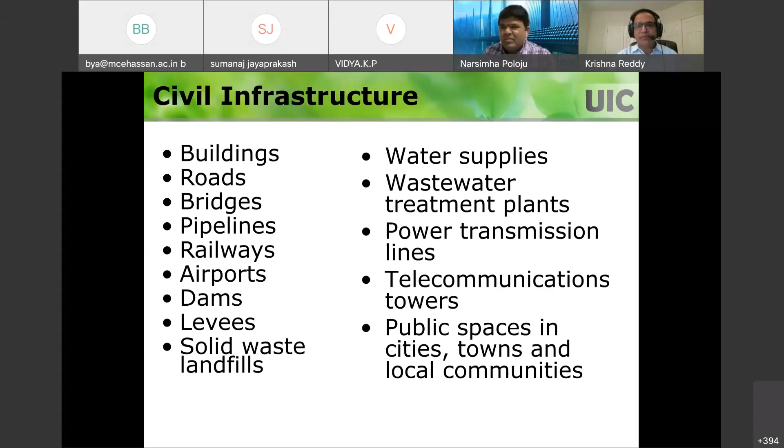With respect to buildings, when you talk about civil infrastructure, a lot of times buildings come into picture. But civil infrastructure is more than buildings—roads, bridges, pipelines, railways, airports, dams, levees, and landfills. Not only that, we have to deal with water supplies, wastewater, power transmission lines, telecommunication towers. So the role of civil engineers is very essential for sustainable development.

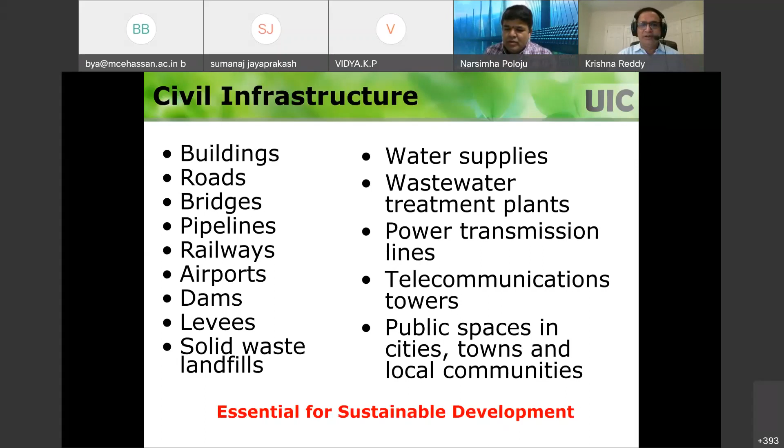So our role is not just building the buildings, but we have to build all these kinds of infrastructure. So that's what we need to keep in mind.

Also, all the infrastructure that was built in the US did not consider sustainability or environmental aspects. As you see from here, a lot of development that happened in the US came at the cost of a lot of ecological damage.

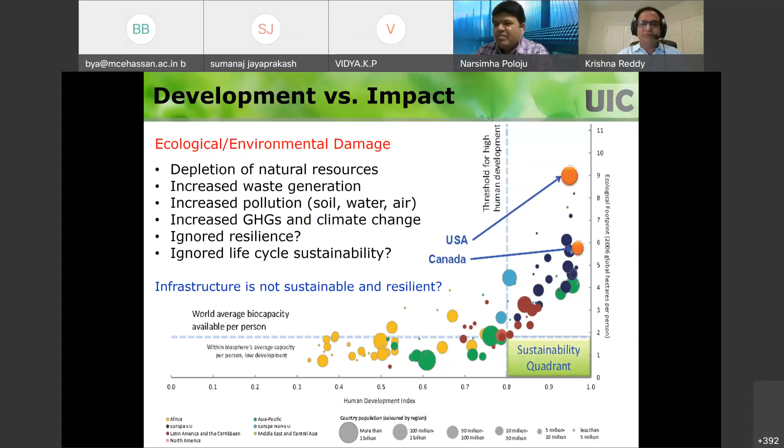As I mentioned, we didn't consider ecological and environmental damage when these were being built a long time ago. We didn't consider energy efficiency, depletion of natural resources, increased waste generation, increased pollution, and we didn't consider greenhouse gases and climate change at that time. We didn't consider resiliency. We didn't consider life cycle sustainability. So there are a lot of things that are now considered important that were not considered at that time. So therefore, the infrastructure is not sustainable and resilient.

So going into the future, we should be looking at infrastructure development in a different way. So the problem with current civil engineering practice is that we follow codes and regulatory requirements and we design for technical safety. That's what we teach in our universities for students.

And then when it comes to the real projects, we look at the design that is easy to construct, that costs less, and that takes less time for construction. So there's nothing wrong with these things. We have to be doing these things.

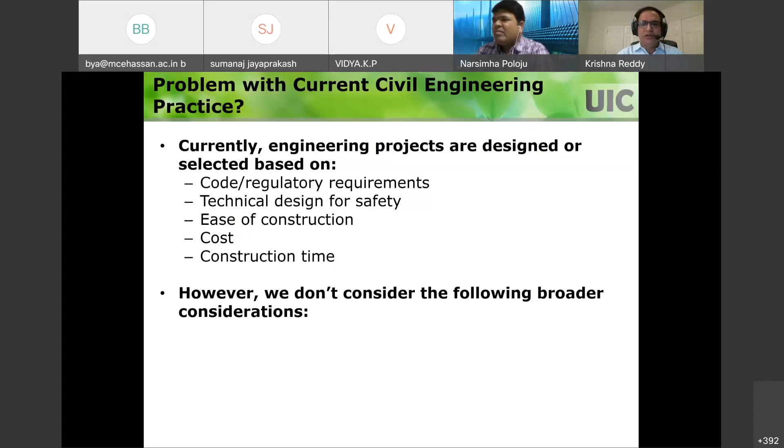But going into the future, we should be considering sustainability, life cycle thinking, resiliency. If you consider these things, we may be coming out with innovative solutions that are effective and economical and environmentally safe, and also contribute towards sustainable development.

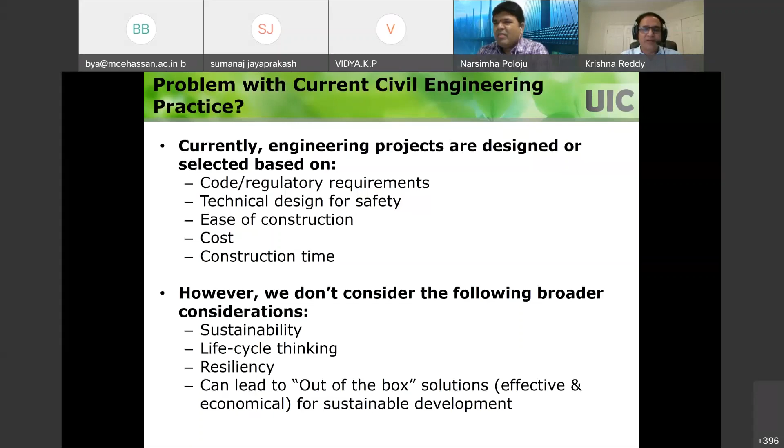So this is where our civil engineers need to be educated and do things in a way that is sustainable and resilient. So a lot of people know about sustainability.

And this definition, this functional definition, can be applied at different scales. It could be small scale or large scale. So that's what we're going to use in my framework.

So when you talk about sustainability, the scale of sustainability projects can vary quite a bit. Global scale, as we speak, COP26 is going on in the UK, and all the countries are thinking about how to cut down greenhouse gases. So that's a global effort. And every country has their own plan, national scale plan, and even India has its renewable energy plan. Regional scale, you could have a state level or city level, or business or institution scale. You could have sustainability assessments within the university or within the company that you're dealing with.

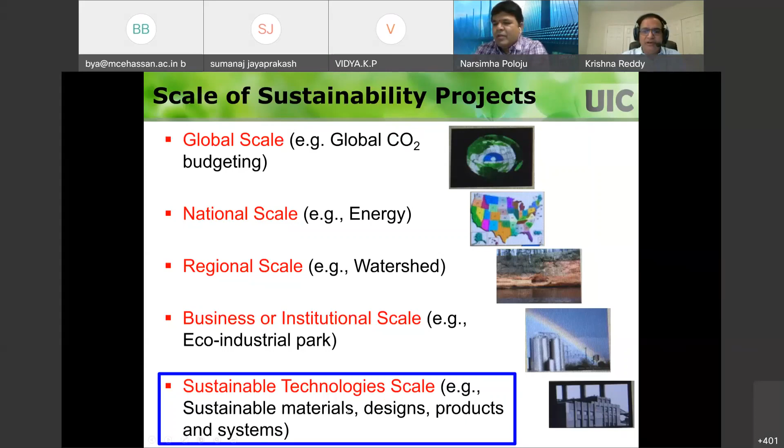But you could also have a sustainable technology scale. And as engineers, in day-to-day activities, we should be able to contribute at this scale, if not at all the scales. So ideally, you want to contribute at every scale. But however, on a day-to-day basis, you should be able to contribute at the sustainable technology scale.

Now the question is, okay, I want to do things based on sustainability and resiliency. So what should I do? How do I go about incorporating sustainability in my work? So this is where you need to look at, okay, I designed something, and how can I say it's sustainable? So we need to have a quantitative framework to assess the sustainability.

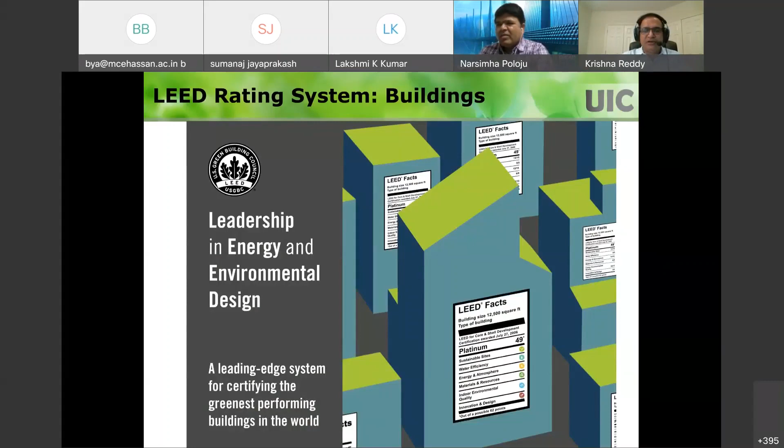Many in civil engineering and architecture know about the LEED rating system. This is for buildings - you get a rating of platinum, gold, or silver based on what environmental features are incorporated in the building. This is one of the systems used to design green buildings, which mainly consider only environmental aspects.

There's another framework called Envision. Since we have LEED for buildings, we didn't have anything like that for assessing other types of infrastructure. So the Institute for Sustainable Infrastructure, in association with ASCE, came up with this Envision rating tool. It's similar to LEED - it has 5 categories with different credits, you score each one, and based on the score you get different awards, just like LEED. There are 64 sustainability and resiliency indicators that you go through to give the rating based on your project features.

LEED is applicable for buildings, and if you want to apply Envision, it has to be a really large project - these are for the overall project. But as an engineer, we may not be looking at the entire project, and may not even be going for LEED or Envision rating. On a day-to-day basis, I want to do my work and incorporate sustainability. So that's what I call project components.

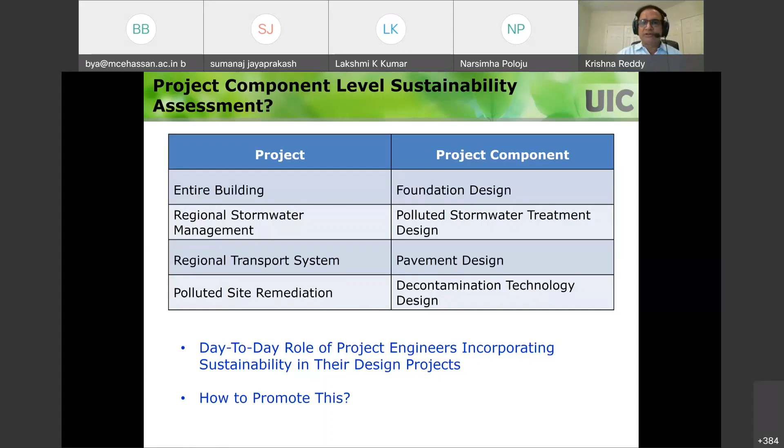What I'm trying to say is LEED and Envision are applicable at a high level, project level, a larger scale. But at the project component level, what can we do? These are the projects engineers deal with on a day-to-day basis, and how can we ask them to incorporate sustainability in their design? How do we promote this? These are the things I've been focusing on recently - how do we consider sustainability at the project component level?

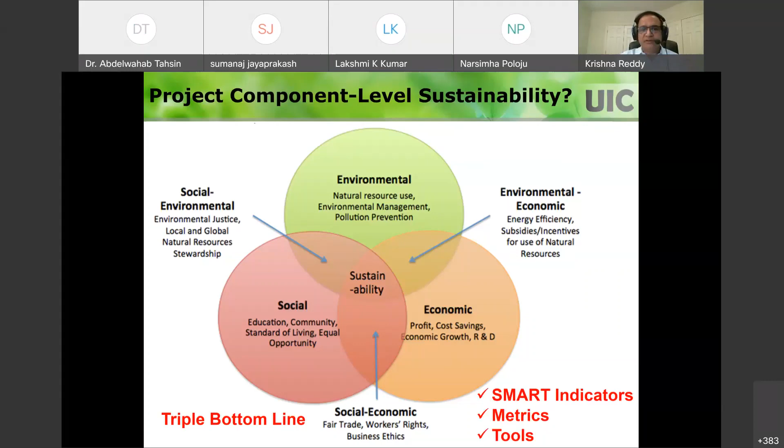Basically, from ASCE's functional definition, we look at this triple bottom line - environmental, economic, and social aspects. But how do we quantify the sustainability of your project? We need to define SMART indicators for environmental, economic, and social aspects. These indicators should have numerical values, metrics, and tools to calculate them. So if we have environmental indicators, economic indicators, and social indicators, all in numerical form, how can we combine them together to assess sustainability?

The other thing civil engineers don't pay attention to is life cycle thinking. We should teach students, and project engineers should consider this too. We need to think starting from mining, where raw materials are acquired, manufacturing of materials like cement and concrete, construction at the site, what equipment is used, gas consumption, emissions, maintenance issues, and at the end of the project, what are we going to do - recycle the materials or send them to the dump site? All these stages have to be thought out at the beginning of the project.

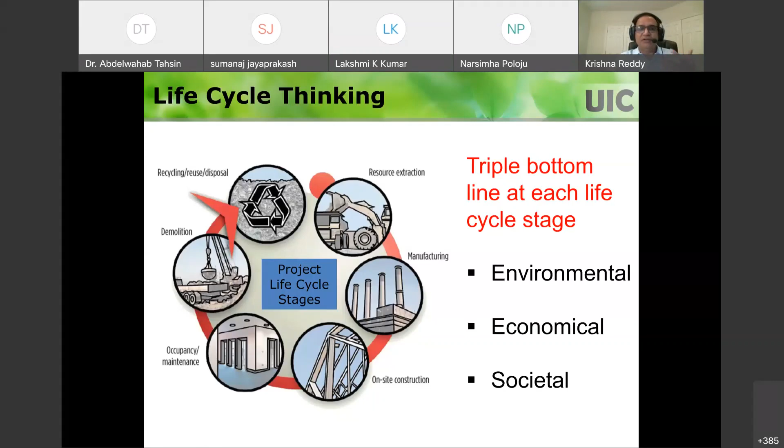We need to consider these triple bottom line aspects - environmental, economic, and societal - at every life cycle stage, and add them together to look at the overall sustainability of your project.

So when you have all these indicators, right, environmental indicators, economic indicators, social indicators, you are talking about multiple aspects. How can we use all those aspects to calculate a sustainability index, a single number instead of all these numbers? Can we calculate the sustainability index?

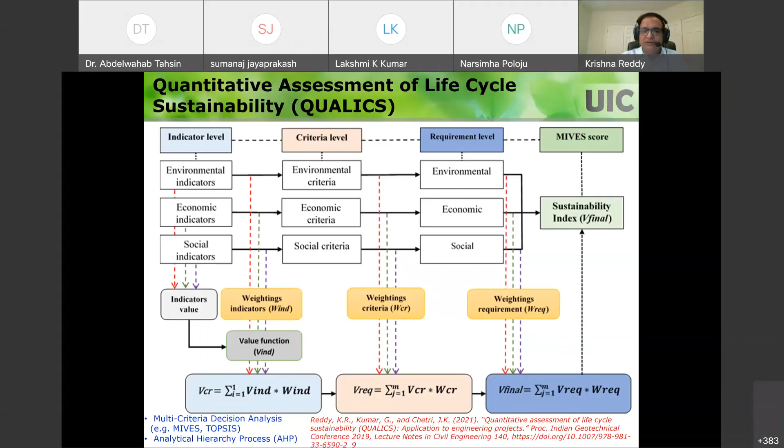So that's what we try to do in our framework called QUALICS. We use multi-criteria decision analysis, such as MIVES and TOPSIS, and we can also weigh different indicators differently using an analytical hierarchy process or similar. We have a publication on this, and I'll be happy to send it if you're interested in more details.

We applied this framework for many projects at the component level. For example, we have a high-rise building with two types of deep foundations possible, and we could design those two types. One is the pile group, another is a caisson or drill shaft. Project engineers know this, and even students learn how to design this in our foundation design classes.

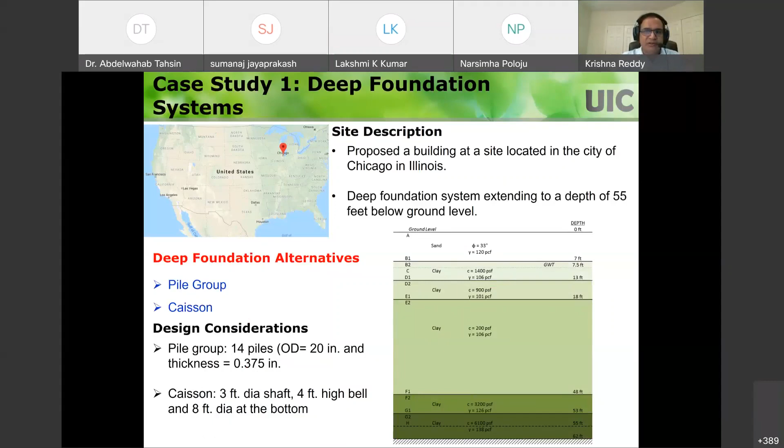Both of them can function, basically supporting the column load, but which one is more sustainable? Applying this framework, you can calculate the sustainability index. Piles have a low sustainability index, whereas caissons or drill shafts have a high sustainability index. So for this particular project, the caissons are more sustainable, and that's why we should recommend caissons from a sustainability considerations point of view.

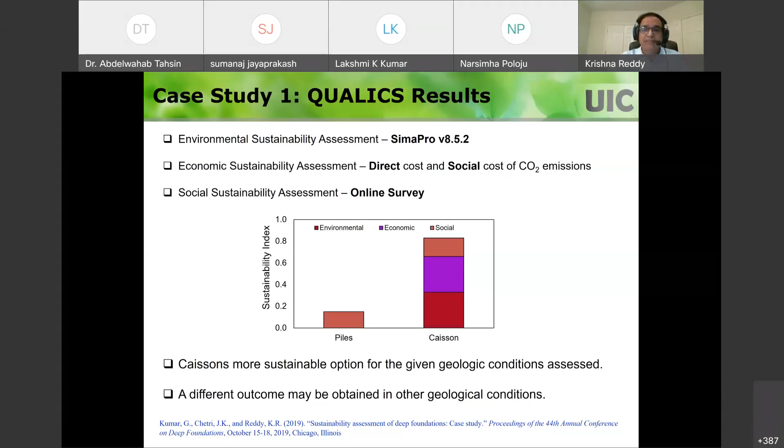So this is the paper here at the bottom. You can get more details about how we did this analysis.

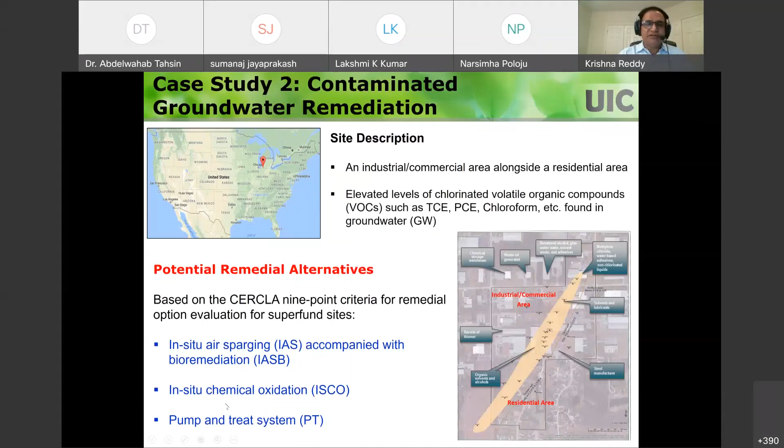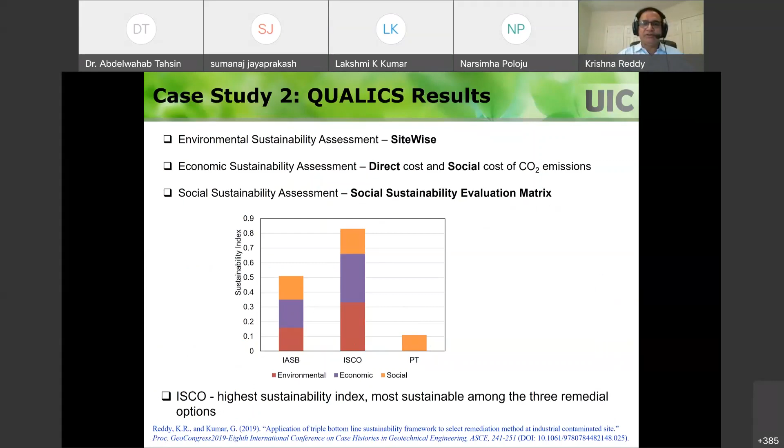The same framework we applied in the environmental field. For example, if you have groundwater contamination at a site, what technologies could be applied to clean it up? We identified three different technologies and used this framework to calculate the overall sustainability index. As you can see, in situ chemical oxidation came out to be more sustainable. So we now have a method to assess different options and come up with a more sustainable option.

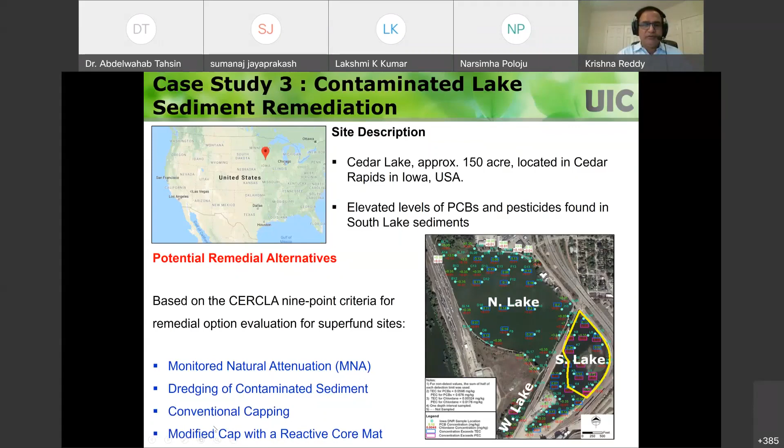Just one more example of how to use the framework. For example, you have lakes and ponds where sediment at the bottom is contaminated. How do you clean it up? Again, this is one situation in the US. We identified four different ways to address the contamination, and then subjected all four to the sustainability assessment. We found that modified capping would be the more sustainable option. So at least you have a methodology, a framework by which engineers can assess their options and suggest something more sustainable. From a technical point of view, all options are good, but from a sustainability standpoint, one may be better than the other.

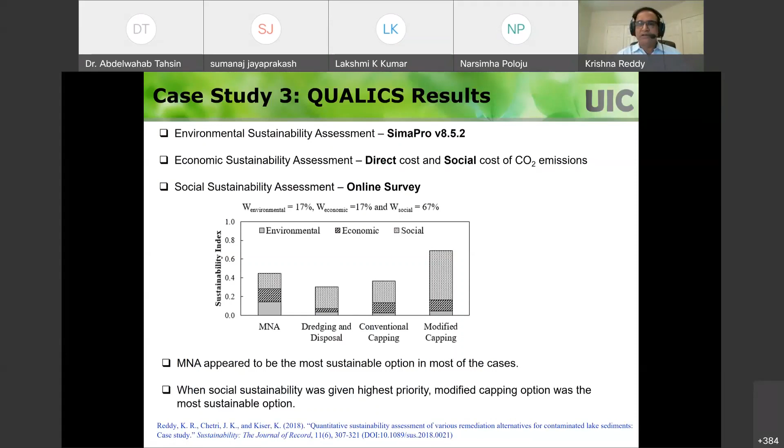So after developing QUALICS, we recently started looking at developing a new framework. In this one, we wanted to integrate resiliency along with sustainability. The previous framework considers only sustainability, that's the triple bottom line: environmental, economic, and social aspects. We wanted to add these resiliency aspects.

We wanted to make it such a way that it can be applied to any life cycle stage or the entire life cycle stage, and also any project of any size. We wanted to make it very flexible, especially when it comes to the tools, whatever tool or information is available that could be useful in this framework.

If you insist on very rigorous quantitative methods, sometimes they may not exist. So we wanted to make this framework very flexible, with tier-based selection of tools using whatever information is possible. Compared to the previous QUALICS framework, which had environmental, social, and economic aspects but no resiliency, now we're introducing resiliency into this one.

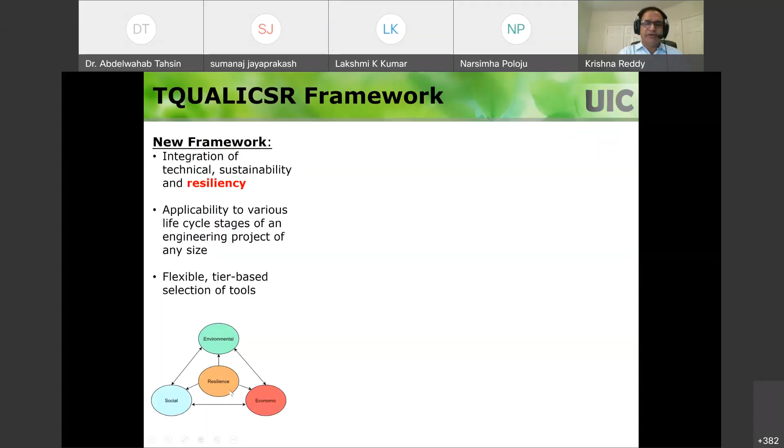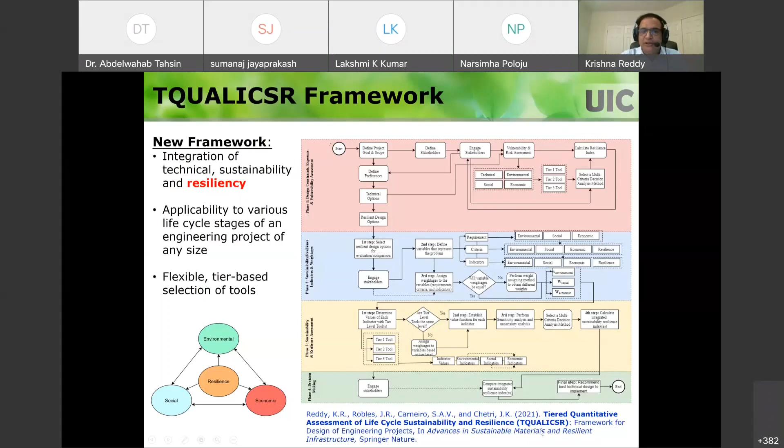So this is the overall framework. I'll go into a little more detail, but it provides a systematic roadmap on how you can accomplish sustainability and resiliency in your designs. We call it TQUALICSR, which stands for Tiered Quantitative Assessment of Life Cycle Sustainability and Resiliency. There's a publication on this, and if you're interested, I can provide that one.

So now the question is, a lot of people may be familiar with resiliency, but those students in the audience, if you know what resiliency is all about - coping, adapting, and growing in the face of uncertain and extreme impacts that may occur over the life cycle of the project. So if some unexpected thing happens, then how would your design perform?

This resiliency can be explained in a better way using this sketch. Let's say you design something, but if something happens - for example it could be an earthquake, or a cyclone, or a lot of rain - you're going to compromise the performance of your structure a little bit, but hopefully it does not collapse. Then when that event recedes, your system should recover, maybe not at the same level as the original, but it should be functionable. Or you want to design it such a way that it can come back to the original performance, or even perform better. So we're talking about these things.

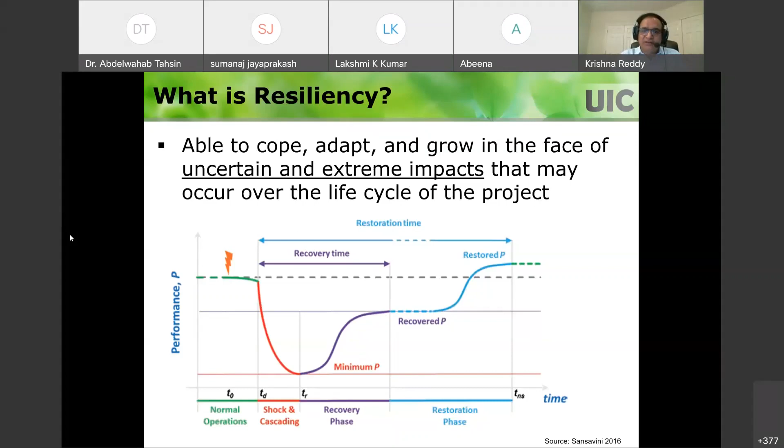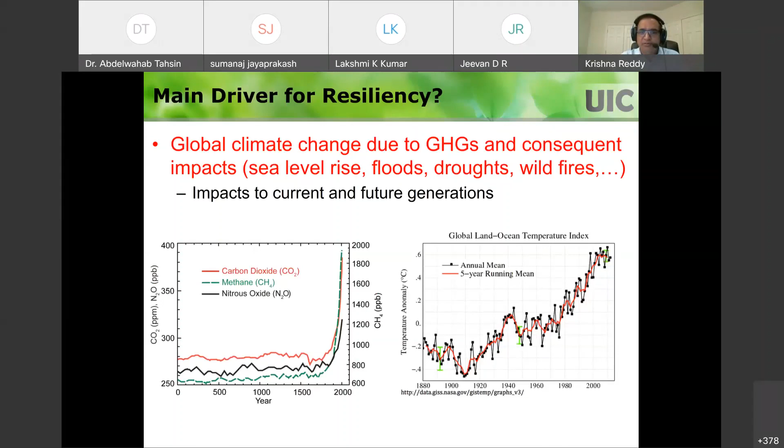Now the question is, what are these uncertain and extreme impacts? There could be different things, but the one that people are concerned about these days is global warming and global climate change due to increased greenhouse gases. That is causing a lot of sea level rise, floods, droughts, wildfires, and so forth. So this global climate change is due to greenhouse gas emissions, and as a result the temperature is being increased globally, and we are seeing a lot of these climate change hazards.

So these were not happening before. Now more and more are happening. As civil engineers, we are not used to considering these impacts. So now is the time we need to consider these impacts.

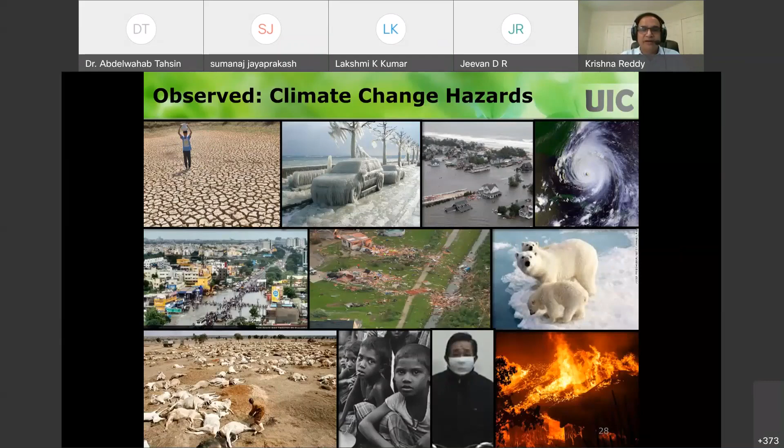For example, this picture you see here, a lot of flooding in Chennai, which was not common. Even now you see a lot of cities which were not prone to that much flooding are being flooded, and we need to consider these things.

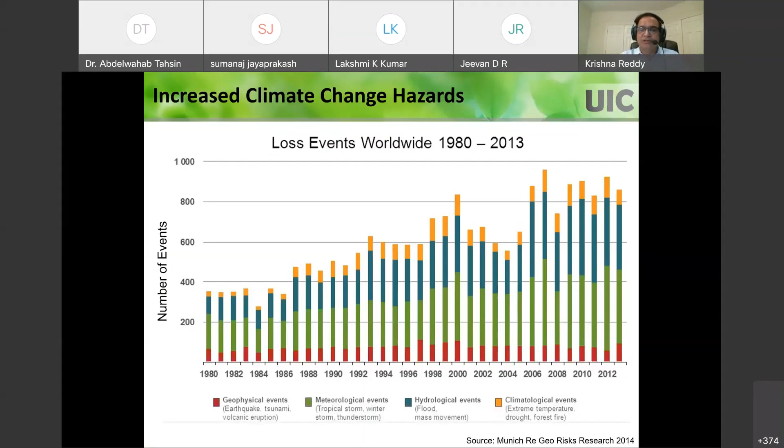So these climate impacts keep on increasing every year. It is not an anomaly. We really need to be looking at and considering these impacts in our design. Currently we don't have a course, we don't have a university curriculum to address these things, but these are all things evolving, and you need to be on top of these things going into the future.

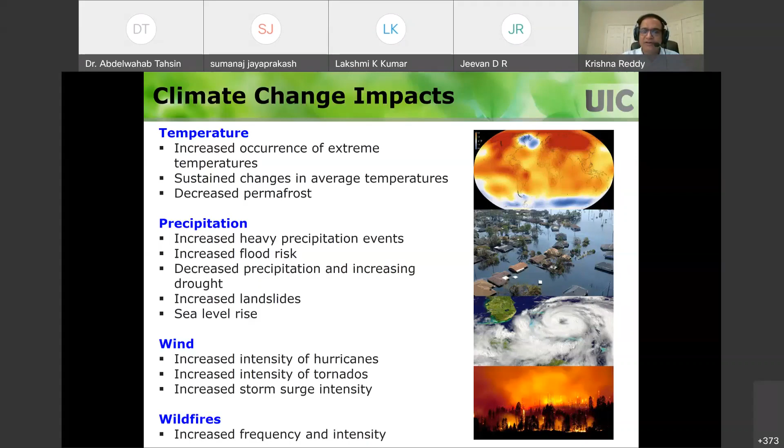So climate change is going to change the temperature conditions. They're not constant all over the places - every place has different conditions. Precipitation and rainfall changes are happening differently. Wind patterns are changing differently. Wildfires are happening differently. So these are the conditions that we need to account for in our assessments.

So coming back to our framework - as I said, we wanted to integrate the sustainability aspects, that is environmental, economic, and social aspects, and also resiliency, basically coping with these climate impacts. So how do we do that? I want to go over this very quickly and show you an example of how this framework could be applied. This framework is divided into 4 phases.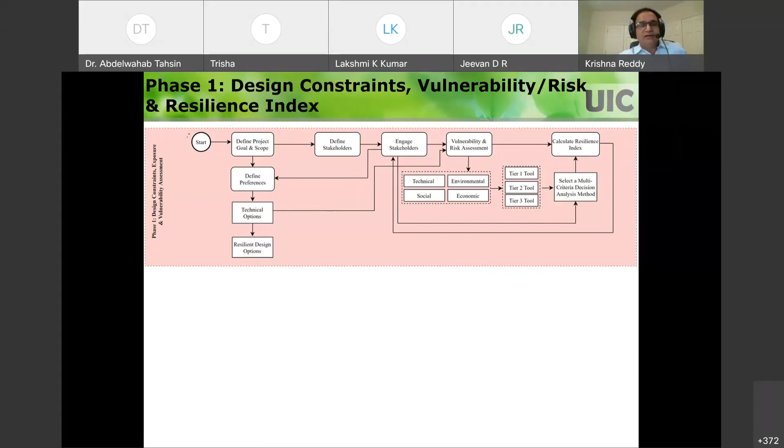This has become extremely important, because if you don't consider resiliency, whatever you design is not going to function in real life going into the future. So this provides a structured flow to include more than technical considerations, and also considers all the different indicators - technical, environmental, social, and economic - in an informed manner.

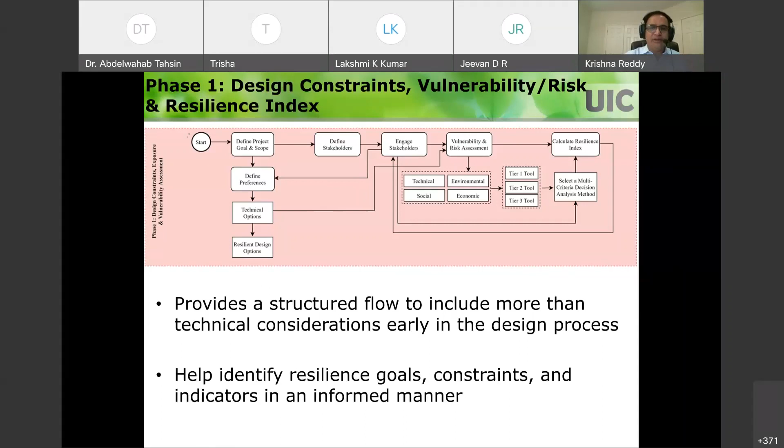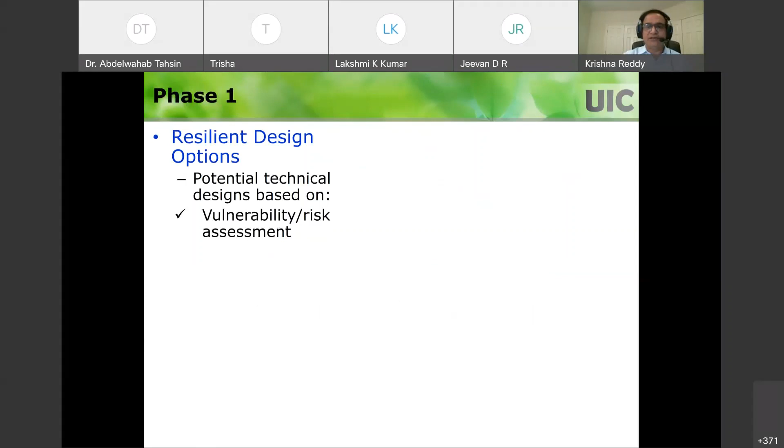So if you want to do something about resiliency, we are providing a roadmap on how to go about it. So the resilient design options are based on vulnerability and risk assessment, and this is something students and project engineers have to know.

And then once knowing the vulnerability or risk, we need to think about what can be done to minimize those risks. So you incorporate those adaptive measures and then redo the vulnerability assessment until your risk is less than acceptable. So we have this methodology: do the vulnerability assessment, think about adaptive strategy, and incorporate all that in the design.

And then even when you construct it, you need to periodically monitor it and reevaluate and redo this vulnerability assessment periodically to see if you are coping up with all the exposure scenarios and hazards that you anticipated in your assessment. Now, if you do that, that's fine. But the question is, even after doing all these things, how resilient is your design?

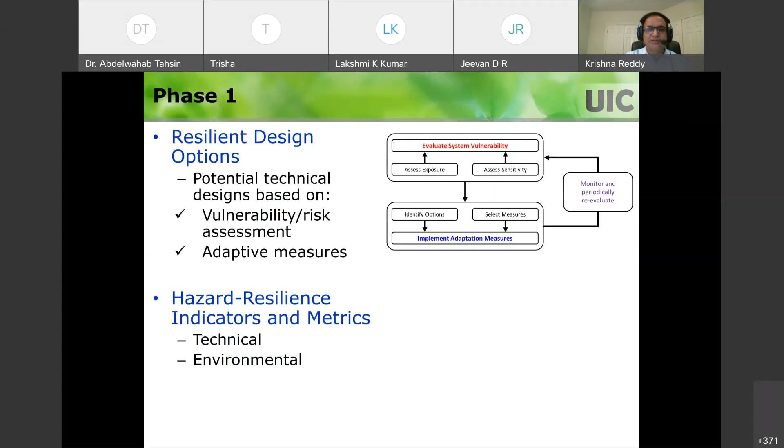So this is where you need to calculate the resiliency index. For this, you need to calculate the hazard-related resiliency indicators and metrics. They could be technical, environmental, economic, and social. So they're all interlinked - one could affect the other.

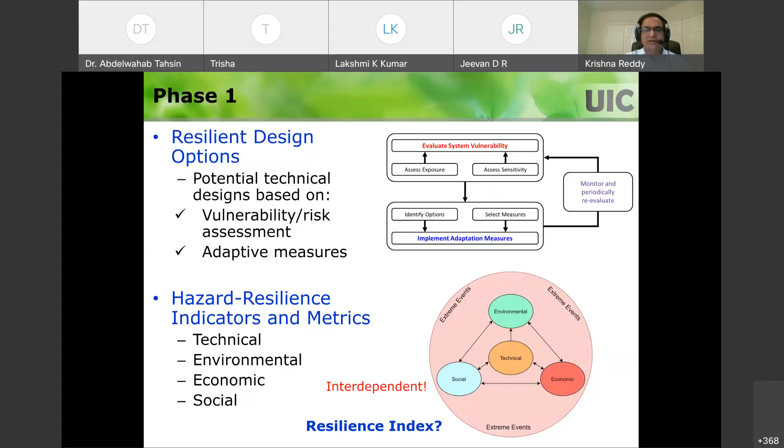So you need to look at the interdependency of these indicators, and then come up with the metrics - that's a really challenging part. And if you have those metrics, similar to QUALICS, we could do multi-criteria decision analysis and calculate the resiliency index. The higher the resiliency index, the better the project will be at resisting the expected future hazards.

So now moving on to the second phase. Second phase is all about sustainability indicators and weightages. So what you have from phase one is maybe 1, 2, 3 design options that are resilient. So you always have options - maybe you have 2 or 3 different resilient design options.

Now what we want to do in phase 2 is the sustainability assessment. For sustainability assessment, you need to define the indicators and weightages. So the first step is to select which resilient design options you want to evaluate for sustainability, and then define variables that represent the problem, and then you have these requirements, criteria, indicators similar to QUALICS.

And so you have these triple bottom line aspects, and within that, in the criteria and indicators, we have environmental, social, and economic, as we had in QUALICS, but we are adding additional indicators for resilience. So what are the resilience-related environmental impacts? What are the resilience-related indicators for social?

What are the resilience-related economic aspects? So those are all the indicators that we need from a sustainability point of view, from this triple bottom line point of view. And then we can apply the weightages, because not all the factors may be equally important.

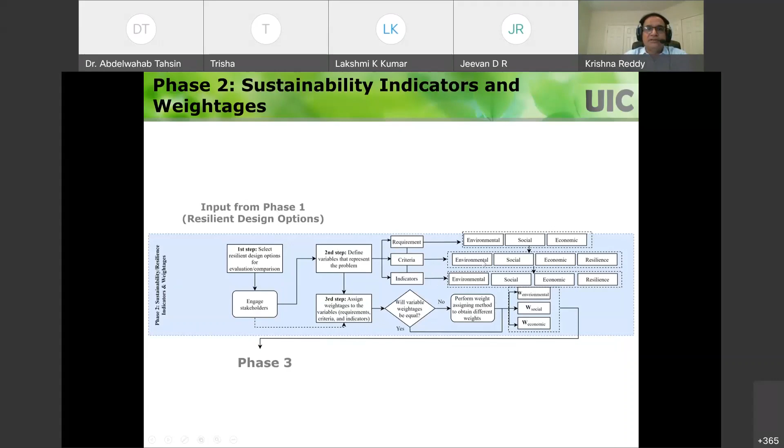So the whole idea of this phase 2 is to identify all the sustainability indicators and associated weightages. Going into a little bit of detail, as I mentioned, the indicators are these four: environmental, economic, and social, and resilience. And you always have to consider the interconnectedness of those, because they're not all independent.

So applying the weightages, as I just mentioned again, we may have to use analytical hierarchy process or something like that, and a tier-based approach that we want to use. In the tier-based approach, I will mention those a little later. You could have three levels of tiers to accommodate whatever information that you have.

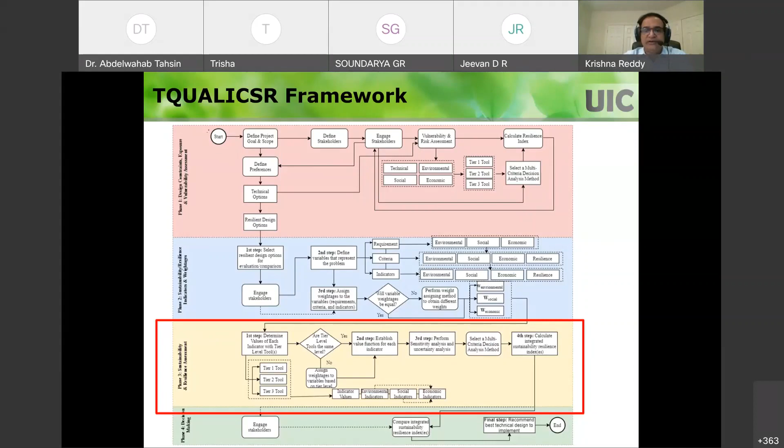A lot of times, the information that you have is not enough, so a lot of times we may not be able to perform. So we wanted to make this framework flexible enough to use any information that you have and be able to perform this assessment. So in the third phase, what we do is we look at all those indicators.

And we need to calculate those indicators using some tools. Here again, the tiered tools we came up with, so there's flexibility to use whatever information you have.

So we have to get the indicator values: environmental indicators, social indicators, and economic indicators. We need to get those indicator values using these tools, depending on what tool level, or tier level, you are using. Tier 3 is a more advanced tool, so then you don't have to worry too much about the accuracy. But if I'm using tier 1 or tier 2, then you need to consider weighing less for those things.

The second step is to convert all these values of different units. For example, economic indicators are all in terms of dollars, and the environmental indicators are in different units depending upon which environmental impact you're looking at. So establishing the value function for each indicator involves normalizing those values.

From 0 to 1, so that we can put everything together and look at all of the things irrespective of their units. So then we need to perform sensitivity analysis and uncertainty analysis, because this is important.

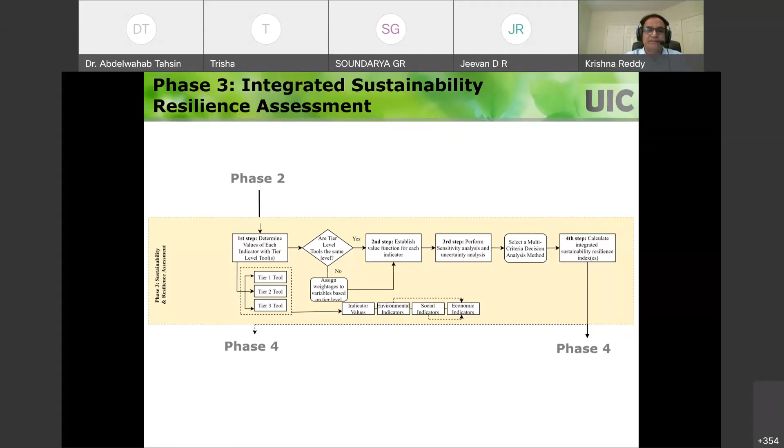So I already mentioned this one. These are the environmental, social, and economic criteria. Within the criteria, you have resilience indicators, resilience-related indicators, and what kind of tools you're going to use for calculating that indicator, and finally you have values, indicator values for this.

So the number of indicators really depends upon your project and the information that is available. And in all these assessments, the challenging thing is to identify indicators and calculate those metrics. So for this, indicators could be qualitative or quantitative, but we need a flexible approach. Some of them can be quantified, some of them cannot be, so we need to develop a system that is flexible.

And then, how do you quantify indicators numerically? This is the most challenging part. And what we did is we proposed a tiered approach.

So tier 1 is qualitative, basically best management practices. Tier 2 is semi-quantitative, using rating systems, where you may have a scale and give a number based on that. Tier 3 is more advanced, we call it quantitative.

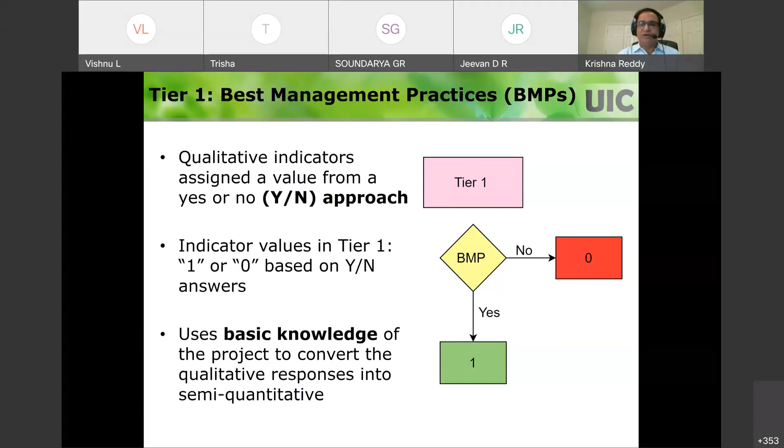In tier 1, you look at the best management practices. You ask, have you considered these best management practices? Yes means you give a score of 1. If you say no, you didn't really do a good job, you didn't consider the best management practice that would have been good to increase resiliency and sustainability, so you get 0. So we can use a scale of 1 to 0 for different identified best management practices, and that way you can come up with metrics for each of the indicators. So these are qualitative, but we have a number, either 0 or 1, associated with each.

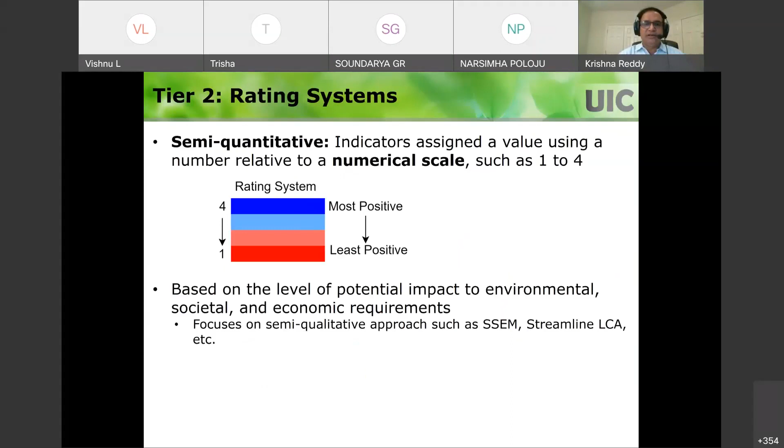The second one is the rating system, more like semi-quantitative. You identify different indicators and create a numerical scale. Maybe 4 is the best option, 1 is the least positive option, and you give the scores for those indicators. There are some semi-quantitative tools I'm mentioning here. SSEM is one of them, streamlined LCA is one of them. They need a little bit more information than tier 1, but this is much better than tier 1.

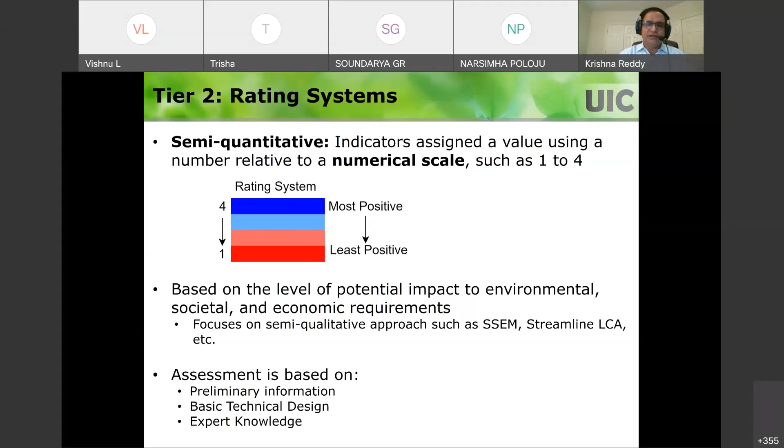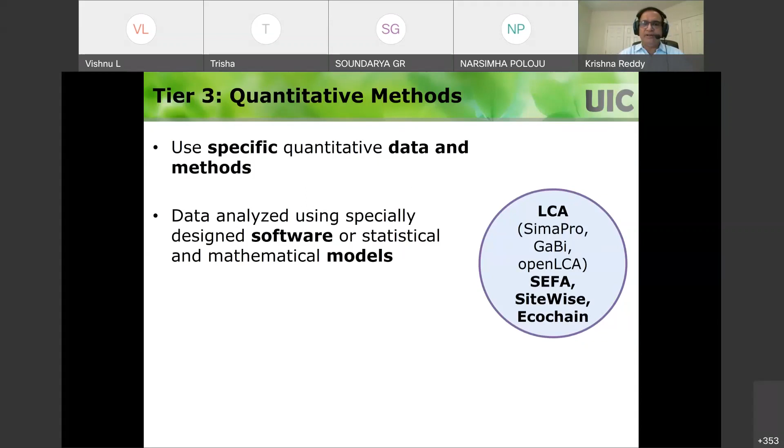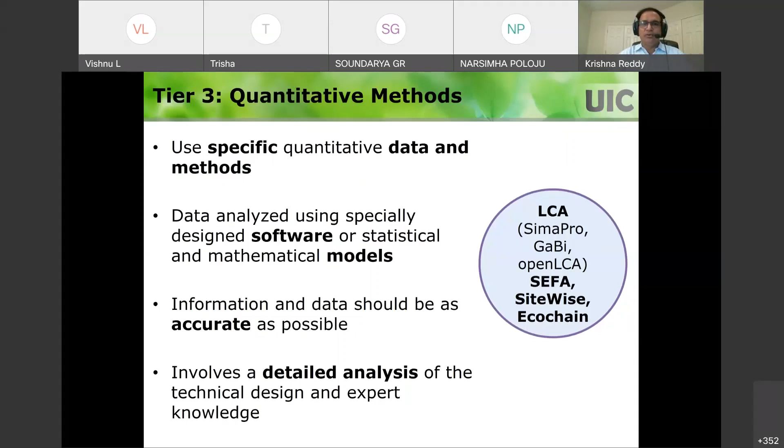Tier 3, you use your project-specific quantitative data and methods, and generally we use software and mathematical models. For example, for environmental things, we use life cycle assessment. You have computer software like SimaPro, GaBi, OpenLCA, which need input and give you detailed output in numerical terms. So this is the ideal situation. If you can identify the input data and have software to get detailed output, this would be the most preferred choice for doing the assessment.

The question is, we want to be able to do tier 3 for every indicator, but that's not possible. We are providing flexibility. You could use tier 1, just use the best management practices. Tier 2 is the rating systems. Tier 3 is the most quantitative, advanced option. So this framework is flexible to consider these different tiers and still be able to perform this assessment.

We need to normalize all the indicators because they are in different units. That's the approach we followed in QUALICS, kind of the same thing we are using here. We use a multi-criteria decision analysis—you could use any multi-criteria decision analysis. When you have multiple factors, how do you make the decision? That's the fundamental goal of doing this.

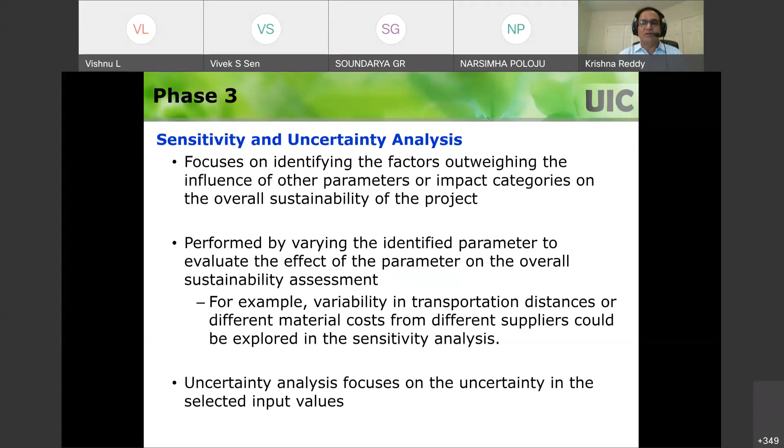As I mentioned, we need to do sensitivity and uncertainty analysis because the input numbers are not fixed, so we need to look at uncertainty about these things. Then we need to calculate the sustainable resilience index. Similar to QUALICS, we look at all the indicators and weighing factors for criteria, for requirements, and for indicators, and then calculate the final sustainable resiliency index.

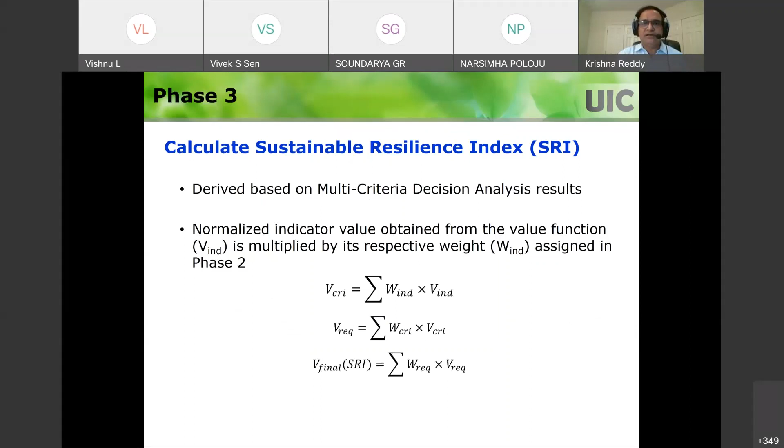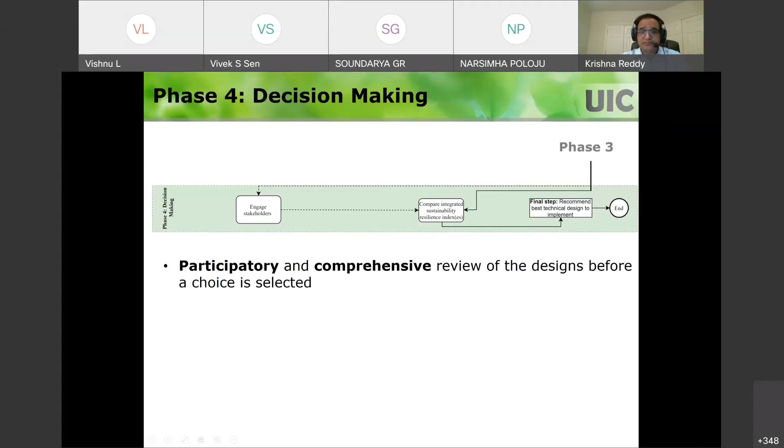So at the end, we make the final decision based on that sustainability index. I'm bringing in the people who are concerned about the project. We need to think about engaging the stakeholders involved in the project—it could be government, financial people, or people affected by it. We need to inform them about our results. Each option has this sustainable resiliency index, and we see the pros and cons of those. You educate them, and finally you decide which technical design to implement. At the end, you are coming up with a recommendation that is acceptable to the stakeholders and is sustainable and resilient. This is the final goal of this whole aspect.

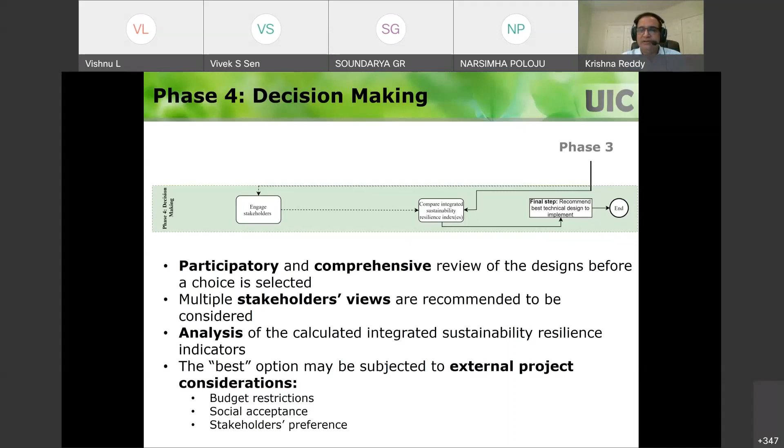And it's not easy. Sometimes even if you get the highest sustainability and resiliency index, the project may not be selected for different reasons—maybe budget constraints, social acceptance, or stakeholder preference. So we need to keep options open, we don't go strictly based on the calculations.

There are many applications you can think of for this framework. We are excited about applying it to different projects, but it's not easy—you need to have data, methodologies, and assumptions.

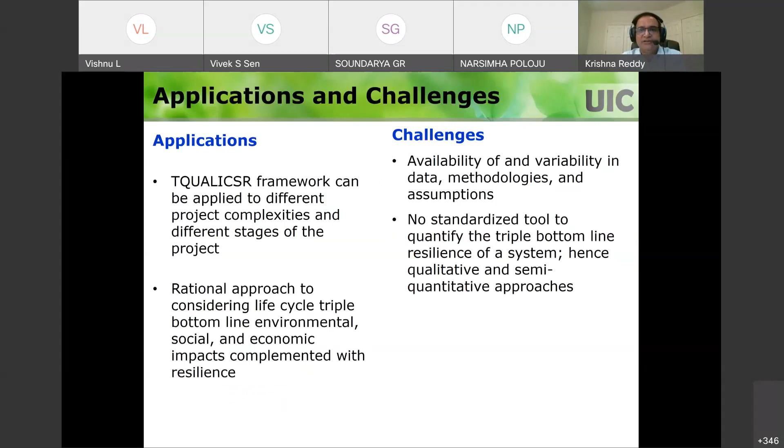There is no standardized tool, so we're dealing with qualitative and semi-quantitative approaches sometimes, and rating systems could vary, and social impacts are the challenging ones to address. But it's good to have a framework that can provide a structured methodology or pathway to follow.

So within a few minutes, I want to explain how this methodology can be applied, because the methodology is there, but if you know how it can be applied, that makes it more meaningful.

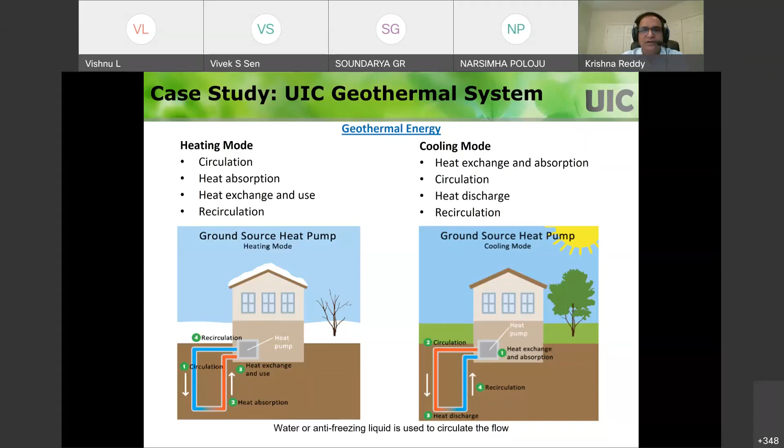If you don't have a geothermal system, you're going to use this conventional heating and cooling system that everybody uses these days. We are trying to avoid these conventional systems because they use fossil fuels. So going into addressing climate change, we really need to use a lot of renewable energy.

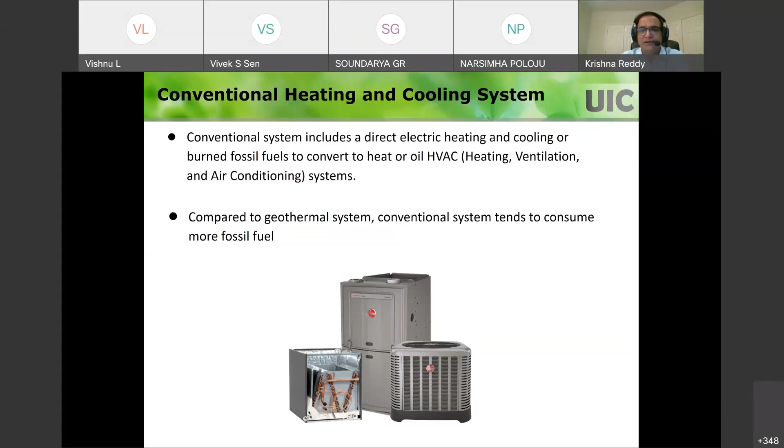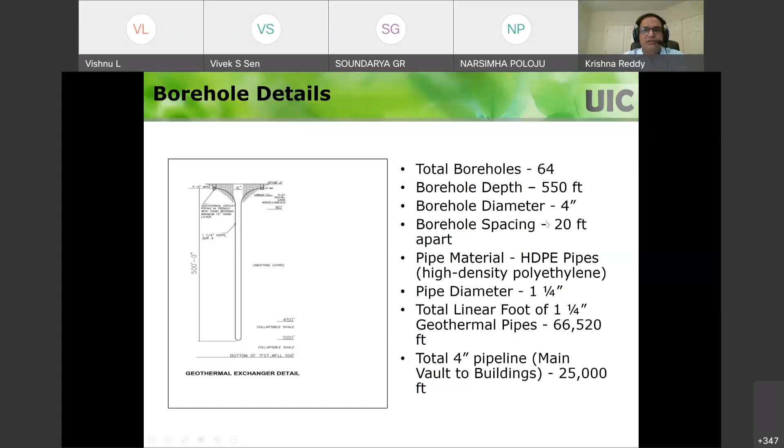For our 3 buildings, we have 64 boreholes going down to 550 feet each. This is the diameter—these are all the details about the geothermal wells that we have. Then we can create a material inventory of these geothermal systems.

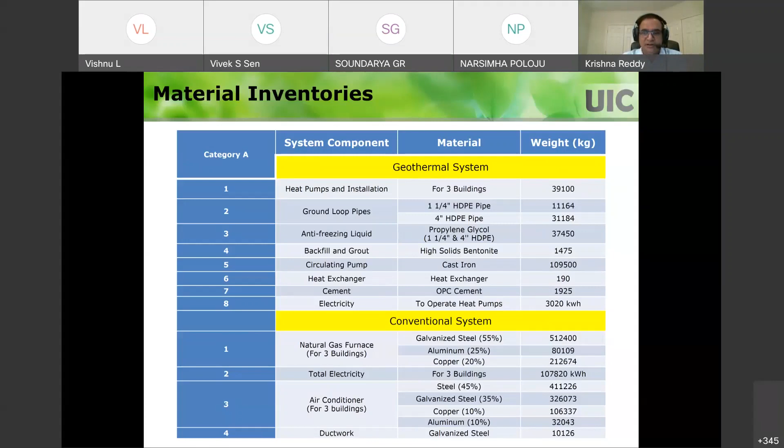So here, what we are trying to do is compare the sustainability and resiliency of these two systems using this new framework—you have a geothermal system and a conventional heating and cooling system.

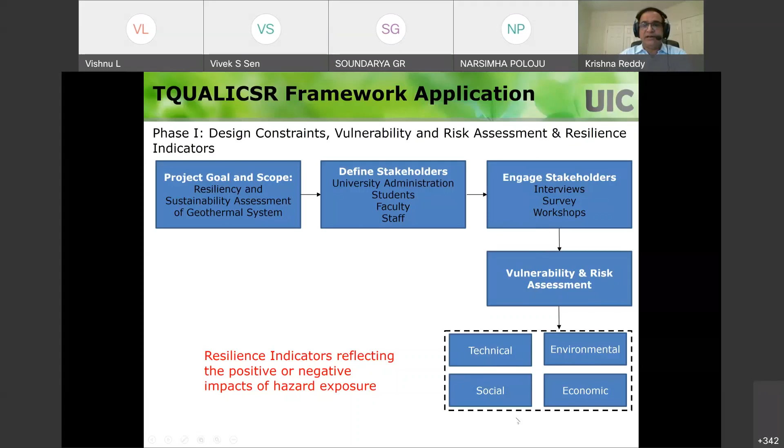Again, looking at this, let's say the hazard in Chicago is extreme heat. These are the criteria, the indicators that we looked at: technical, environmental, social, and economic.

For example, in the technical category, if you have extreme heat, maybe the geothermal energy is not sufficient to meet the energy demand. Or what happens if some equipment malfunctions? These are the kind of technical issues you can look at.

Environmental issues—what happens with air circulation issues. Social—what happens if you have extreme heat and this doesn't function, so what is the occupant comfort? And economic—if that doesn't work, you need to have backup energy, emergency repair, and so forth.

So basically, you need to identify indicators, apply the weighing factors for those things, and then these indicator values are based on the rating system—semi-quantitative, tier 2 level, applied here.

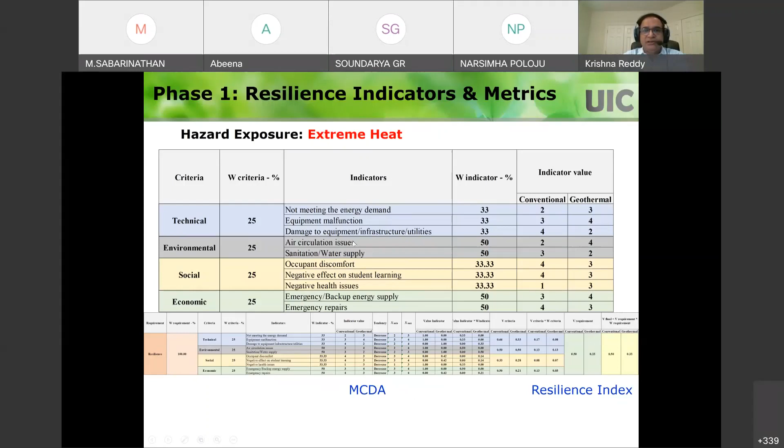And then we apply multi-criteria decision analysis based on these indicators, and then calculate the resiliency index. The resiliency index we calculate based on phase 1 for conventional is this, and for geothermal is this.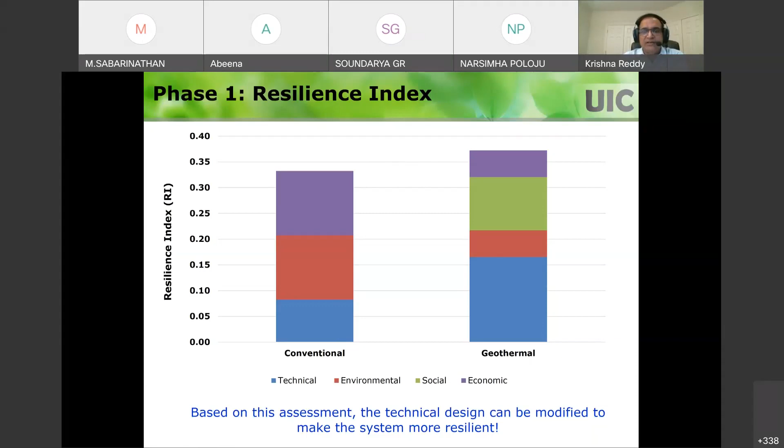There's not much difference between those two. That indicates that the technical design could be made better to be more resilient—you want to increase this resiliency index to be higher. That's kind of a lesson learned, and maybe if the project was starting or proposed, you can go back and look at your technical design and change it.

Phase 2 is all about sustainability indicators and weightages. Here are all our environmental, economic, and social requirements.

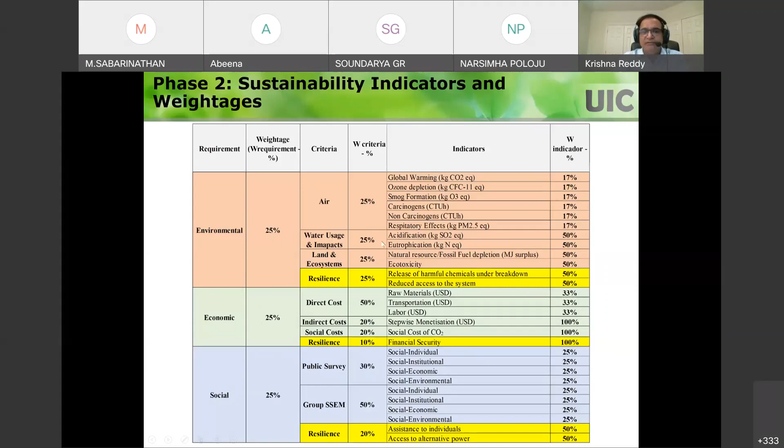Within the criteria before for sustainability assessment, we had only the environmental aspects, but we are looking at the resiliency of these environmental requirements. So again, economic - we are adding resiliency for economic and resiliency for social.

So that's how we are integrating sustainability factors - these are the triple bottom lines, with the resiliency. And then we need tools to calculate this. For environmental aspects, we use life cycle assessment, which is an advanced tool, like a tier 3, calculated more accurately. For resiliency, we use quantitative rating tools. Direct costs you can use advanced tools to calculate. The social aspects are mostly based on rating tools, tier 2 levels.

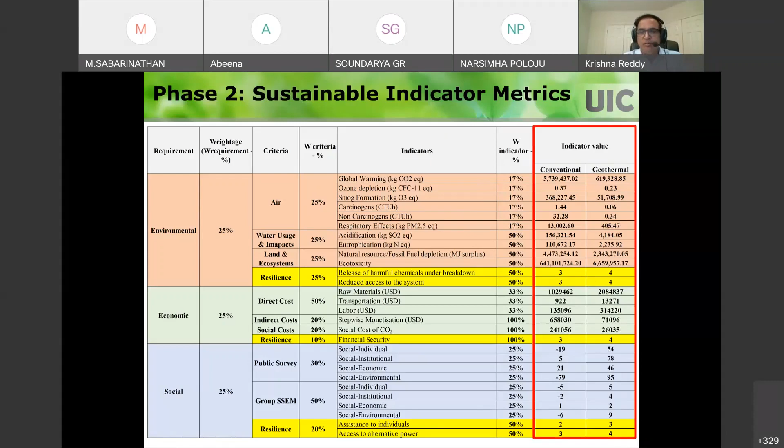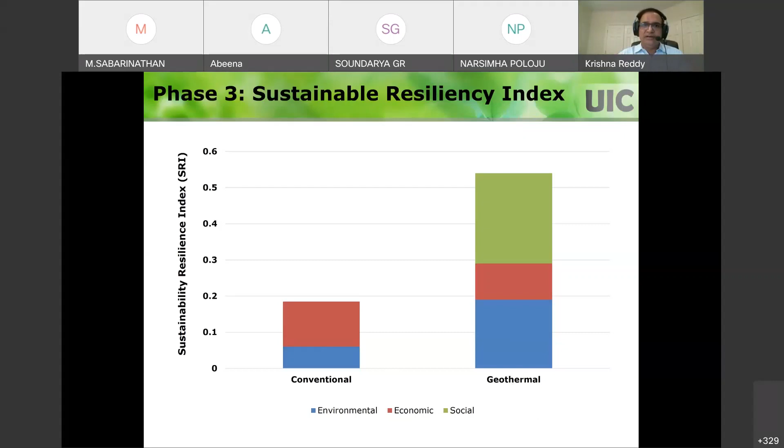So basically we need to calculate these indicator values based on that flexible tiered approach that we proposed, and then based on all these things you can calculate a sustainable resiliency index. Because of a lot of sustainability aspects, geothermal comes out higher with the sustainability resilience index compared to the conventional. Resiliency built-in is less, but sustainability is more. Overall, this is highly sustainable and resilient compared to the conventional system.

So now that's phase 3, and then fourth is the decision making. You do all these calculations, but you're not going to go strictly with the results you get based on your framework calculations - there are a lot of other factors that go into the picture. For example, this geothermal project was done many years ago, and at that time they were not sure whether the geothermal would work or not, so I think they ended up having conventional as a backup system. So you ended up with both systems, conventional and geothermal, which is obviously not ideal if you want to do similar projects going into the future.

So the decision making is always difficult, and you need to look at who the stakeholders are, what their preferences are. All the other factors come into the decision making.

So if you want to do this, you need some help, right? These assessment tools provide a structured flow or methodology for how you can incorporate the technical triple bottom line aspects - environmental, economic, and social - and resiliency dimensions. So now engineers have assessment tools to incorporate sustainability and resiliency.